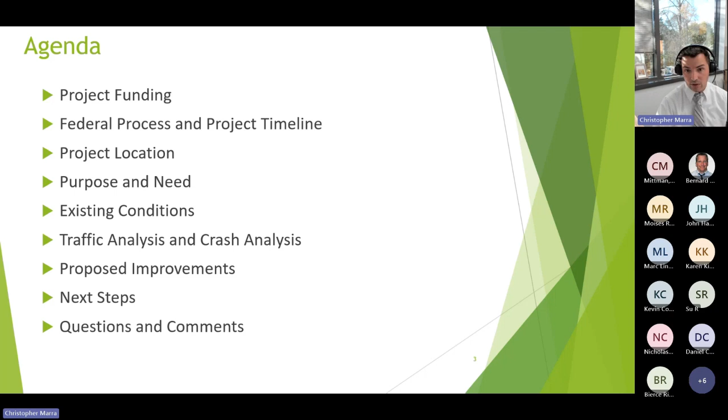Today, we'll review our efforts to date for this project, starting with a quick overview of the federal funding process and NJTPA's role. We'll then review the project location, purpose and need, existing conditions, our analysis of the traffic operations and crash history, our proposed improvements and next steps, and then we'll open it up for questions or comments.

So Christine, I didn't know if you'd like to go over these two slides. Sure. So this project, both design and construction, is being funded by the Federal Highway Administration. I'm with the North Jersey Transportation Planning Authority. We're the metropolitan planning organization that represents the 13 counties in northern New Jersey. So we provide federal funds to counties and municipalities for, in this particular case, safety improvement projects.

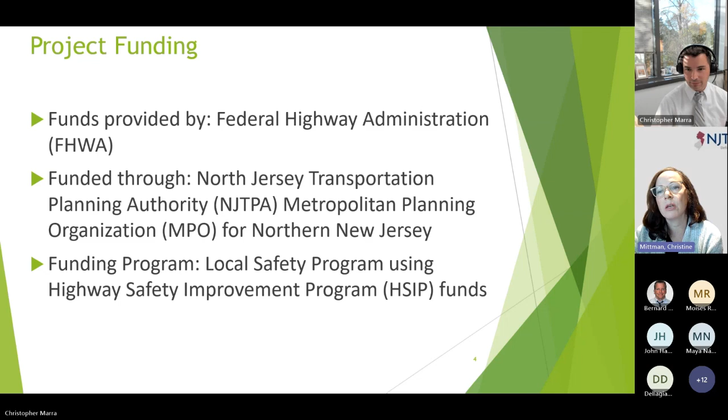So I manage the local safety program. It's a program that was created by NJTPA to fund federal dollars from the Highway Safety Improvement Program Fund. It's a special pot of money from Federal Highway that funds safety improvements at locations, corridors, or intersections which are identified as high crash based on existing crash data. So we have a solicitation that we do with our counties every other year. They submit applications, and then once our board approves them, we move them into design, and then ultimately, as we go through this federal process, they'll be authorized for construction.

So this is the federal process and the project timeline. Like I said, it was an application approved by the NJTPA board into a specific program year. We went through consultant selection to hire the design consultant. Once they were on board, we began preliminary engineering. That's the phase we're currently in. The consultant has spent quite a bit of time now working on data collection, laying out and refining the design of that intersection based on the data that they have collected.

We've met with local officials, and then we're here tonight to do a Public Information Center, and that's a required and integral part of any federally funded project, because at this point we're looking for comments and also answering questions from members of the public on what's being proposed at this intersection. Once we complete this PIC meeting, and if there's any changes made to the design, then we move on to getting an environmental document approval. It's a process that we work with New Jersey Department of Transportation on. It's part of every federal project to have an environmental document.

It's called a categorical exclusion document approval. Once we have that, then we can move into final design and right-of-way if there is any on the project, and then the project can be authorized for construction. This whole pipeline process that you see here laid out takes about 5 years from when a project first enters to the time it gets to construction.

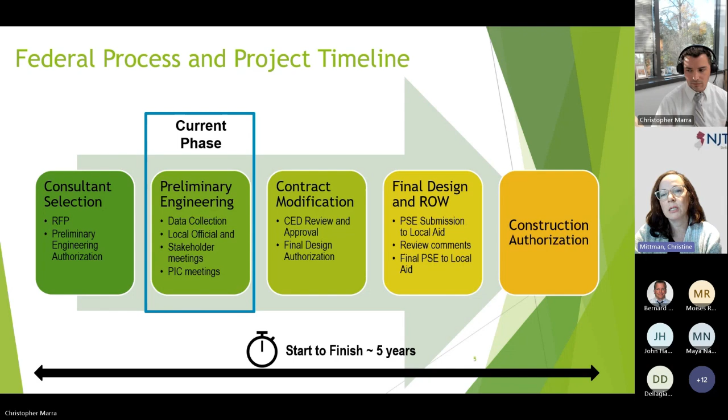So we'll go over the project location. The project area consists of the intersection of Morris Street and Ridgedale Avenue, located approximately 800 feet west of I-287 and a half mile east of the Morristown Green. The area is primarily commercial, with a BP gas station, GT Motors used car lot, and Meslers Auto Body located immediately adjacent to the intersection.

There are residential properties also close by, including the recently constructed Max on Morris apartment complex in the southeast quadrant. The project intersection serves as one of the primary gateways into Morristown, and multiple NJ Transit bus lines on both Morris Street and Ridgedale Avenue, coupled with its close proximity to the Morristown train station located just west of the project area, make it a major hub for transit users and pedestrians.

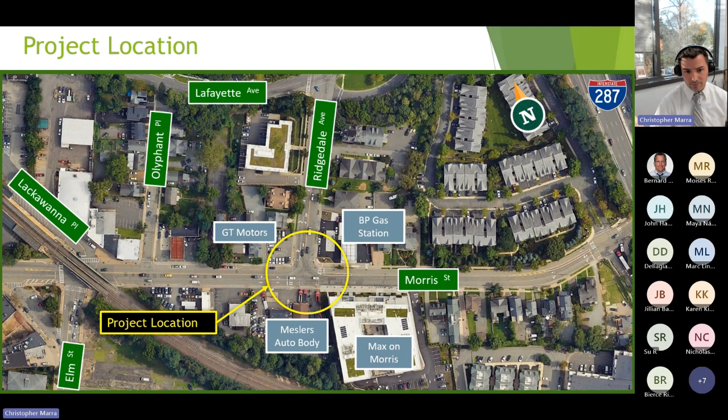The project purpose is to provide safety and operational improvements at the intersection of Morris Street and Ridgedale Avenue. The need is driven by the intersection's ranking as number 11 in Morris County for NJTPA's 2023 network screening list. There was also a road safety audit conducted in October of 2020 along County Route 510, which included this intersection and identified numerous deficiencies contributing to the high crash rate within the project limits and at this intersection.

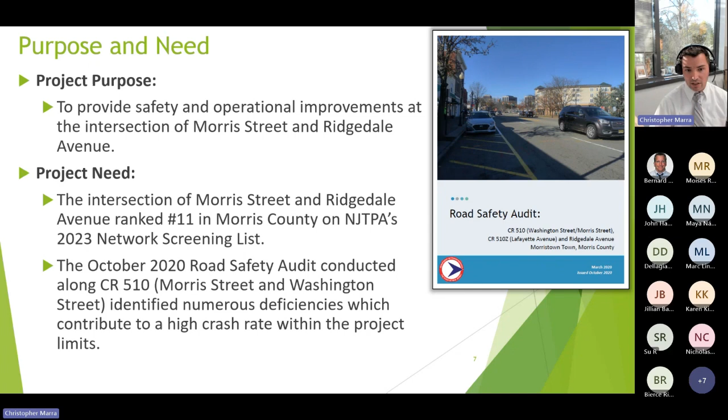Morris Street, also known as County Route 510, is an urban principal arterial consisting of 3 lanes, 2 eastbound and 1 westbound, with an ADT of 22,000 vehicles per day. Ridgedale Avenue is an urban minor arterial with 4 lanes at the intersection with Morris Street and an ADT of approximately 14,000 vehicles per day. Both roadways have posted speed limits of 25 miles per hour.

The project location suffers from a number of deficiencies which reduce accessibility and contribute to congestion and a high crash rate. The existing signal equipment does not meet current ADA and MUTCD standards, and the sidewalks and curb ramps are also non-compliant and/or in poor condition. Parked vehicles in lots adjacent to the intersection corners regularly encroach into the sidewalk area, reducing pedestrian space. The intersection corners also have insufficient radii to accommodate the turning paths of larger vehicles such as buses or trucks, and poor lane alignment along Morris Street increases the potential for sideswipe crashes.

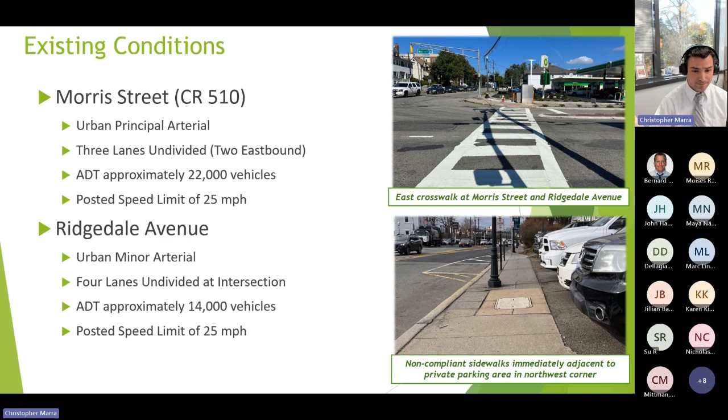In October 2022, we performed a count program to collect traffic volume data within the project limits. Turning movement counts were performed at the intersection during typical weekday AM and PM peak hours, as well as Saturday afternoon peak hours. Automatic traffic recorders, or ATRs, were installed along the main lines to collect traffic volumes for a full week along both roadways. Using the collected traffic data, we prepared a traffic model in Synchro and analyzed the existing conditions as well as the 2050 future conditions using population and employment projections from NJTPA.

Based on analysis of the available crash data and NJDOT's Safety Voyager, we identified 49 crashes occurring within the project limits for the 3-year period from January 1st, 2019 through December 31st, 2021. When compared to the statewide average, we identified overrepresentations of rear end, sideswipe, right angle, left turn, and pedestrian type crashes. We also noted overrepresentations of crashes occurring at dawn and dusk, which could be indicative of sun glare issues.

The October 2020 road safety audit identified a number of opportunities for improvements to safety and operations at the study intersection, including upgrades to curb ramps and driveway aprons. The road safety audit recommended traffic signal upgrades such as larger 12-inch LED traffic signal heads with retroreflective backplates, countdown pedestrian signal heads, audible PROWAG compliant push buttons, and also to investigate split phasing for the Morris Street eastbound and westbound approaches. Lighting, which is currently provided via decorative street lights, suffers from repeated knockdowns, which results in dark spots.

A refresh of the pavement markings and use of high visibility ladder style crosswalks, as well as signing upgrades, would benefit safety and reduce potential conflicts for vehicles. Lastly, driveway access within and adjacent to the intersection should be investigated for potential improvements.

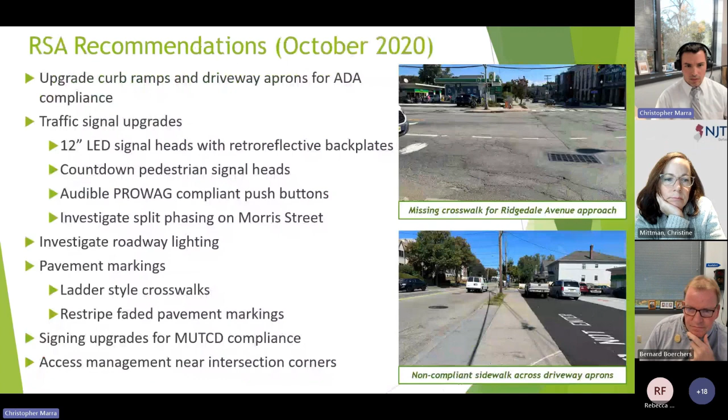So we had done the counts, which I'll go back to that slide. The counts were done in October of 2022. The actual peak hour counts that were counted, we selected a weekday. It was either a Tuesday, Wednesday, or Thursday, and then we also did a Saturday count that month. The automatic traffic recorder counts were done for the full week, so we have the full week's volumes.

I don't believe we have speed data from that. We just have traffic volumes. I could check on that and see if the speed data was also collected, but typically it's only the volumes that's collected.

Also, Chris, do you want to talk about what we do in final design? That's when you really get into the traffic signal design and the timing of each phase, and adjustments are made sometimes for the pedestrians.

For this project, at least during PE, we carefully, when we did the analysis, we took into account all the pedestrian clearances and everything. So those are brought up to the current standards. Instead of a 3.5 feet per second crossing speed, which is the standard for MUTCD, since we know this is a high pedestrian area, we looked at a 3 foot per second crossing speed to make that better for pedestrians, so there's more time to cross.

As far as pedestrian refuge islands, they're great. If some of these crossings seem long, they're good for locations where pedestrians can't make the full crossing, but our intent is to make sure that the traffic signal will provide the full time a pedestrian would need to cross. And again, with islands, it tends to be an issue because we have high bus volumes.

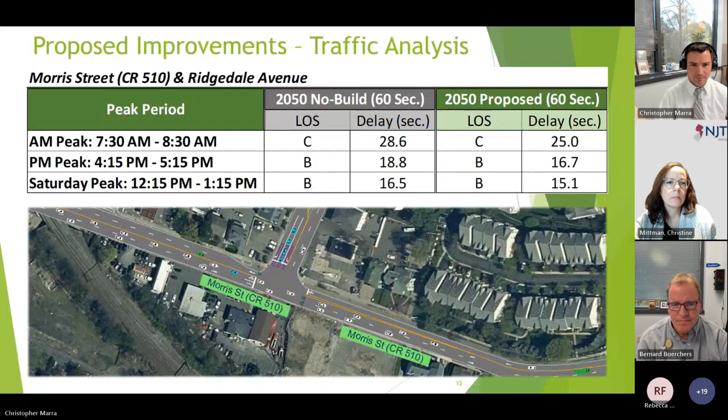You can bring them up really quick. Hang on, sorry, I gotta get Emily back in here. There we go. It's kind of difficult to see because this is a little scrunched and things got cut off. But yeah, it is a relatively small volume. I hate to say small, but—

The westbound volume coming on Morris Street: you have 86 in the AM peak, 86 vehicles making the right turn, 23 going through. PM, it looks like you have 123 making the right, and 40-something making the through.

And there are definitely alternate routes. That is—definitely, we could have conversations with Morristown. Unfortunately, we can't make that call, because the residents down Ford Street probably wouldn't want that. So that's something Morristown would have to support before we could even consider looking into that further.

I know that's how it was when I started working for the county—there was no westbound lane at that time, it was one way. I assume when that development down Ford was built, that's why it was changed. That's a good point, I remember that as well. So I think that's something, but like you said, it would have to be a conversation with Morristown. Correct.

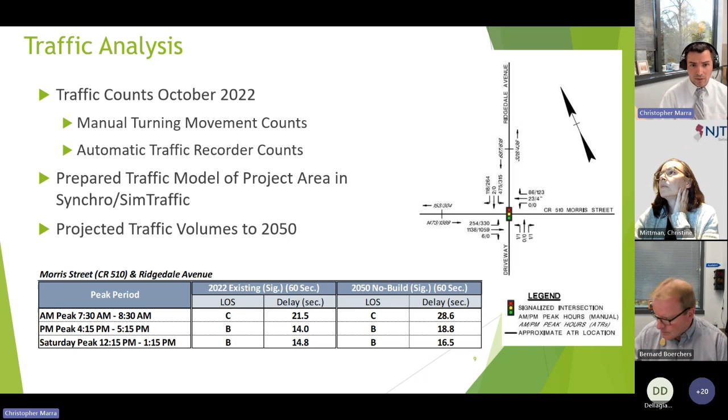A leading pedestrian interval is a non-infrastructure option that can further improve visibility and safety for pedestrians. This was successfully used at a signal in Morristown Medical Center to allow pedestrians a head start. I agree, and that's something we can maybe look at on top of the signal timing here and see what the impacts are. They typically run between 3 and 7 seconds, and that does allow pedestrians to establish themselves in the crosswalk. So that's something we can absolutely look at.

I'll go next to, I think, Nicholas, who had their hand up. I'll unmute you—if you want to unmute yourself, you can go ahead and chime in. Nicholas Calabrese, oh there he is. Got it. All right.

Thank you so much. So, yeah, I live pretty close to the intersection—I'm on 6 Ridgedale, just a little bit up Ridgedale from the project. I walk every day into town to go to work, at Headquarters Plaza, so I know a lot about the intersection. First of all, I want to say that Rebecca's claim was 100% true—that single lane really helped the traffic a lot. Everything was a lot smoother and actually flowed a lot faster too. So I can validate that claim.

Second, I notice a lot when walking on these roads that the sidewalks are very small. I'll often be walking and have to walk into the road to pass someone, because you can't really fit more than two people shoulder to shoulder, or one bigger person, without fumbling through the bushes on someone's yard or going into the road to get around them.

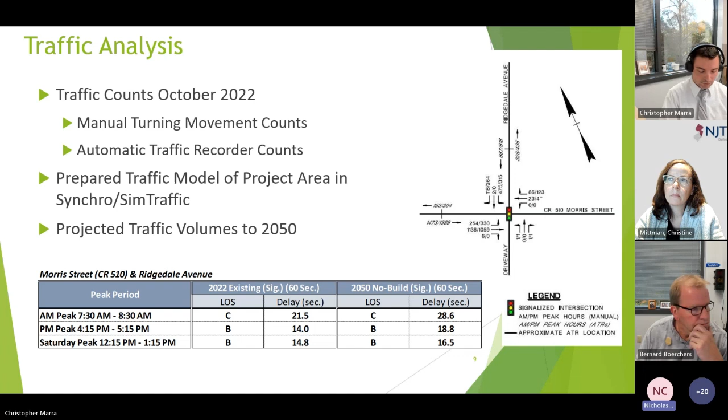As for Ridgedale Ave itself, it's not mentioned in the project area, but if you go down there are even more condos there, like two entire complexes plus the new one just built. So there's a lot of traffic that could come through this area toward the train station. I think it makes sense to make this more biker and pedestrian friendly to take cars off the road for those users who probably take the train into Manhattan, because a lot of people in this area moved here because of that train into Manhattan, to work either in the center of New York City or in Morristown proper.

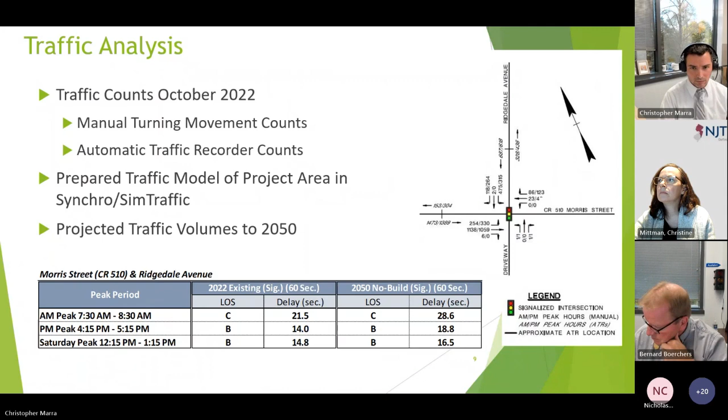Outside of that, let me see... Yeah, that's the one thing I'm concerned about: the widening of the lanes. I've done a little studying in a GIS course, and when you have wider lanes it makes people want to go faster because they feel they have more space and maneuverability. While I can see the argument that narrow lanes hurt the bus, I'm not sure where we draw the line in terms of our values for what we want in this intersection.

That's a good question, Nicholas. It is shown that a narrow lane slightly reduces speed. It's not a significant reduction, but it does have value. We really can't go below 11 feet, though, because New Jersey Transit buses' mirrors actually require that width — it's a requirement that they need the 11 feet. So that's as narrow as we're really allowed to go.

Yeah, okay, thank you so much. I agree — oh no, yeah, no problem, that's just a thing we'll have to deal with.

The other thing is, I've done a little research into induced traffic. The more traffic that can flow through will incentivize more people to drive if they can have a slightly shorter commute, which may increase the traffic volume of the area as a whole. And we're already pretty saturated, because there are two new entire office buildings just constructed, with a third one going up soon. I think if we bring more traffic into the area it will just make the clogging worse, as opposed to maybe incentivizing people to take the train, which is a pretty short walk from those office buildings.

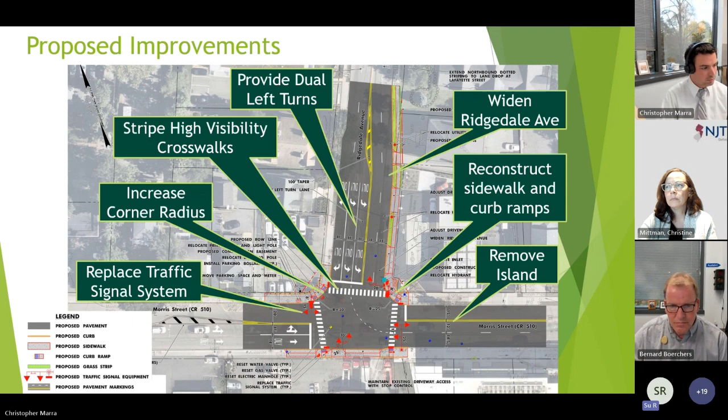I wanted to address that parents walking with strollers might not be able to cross as fast as an able-bodied person walking, so it doesn't seem like it's addressing how scary this intersection really is.

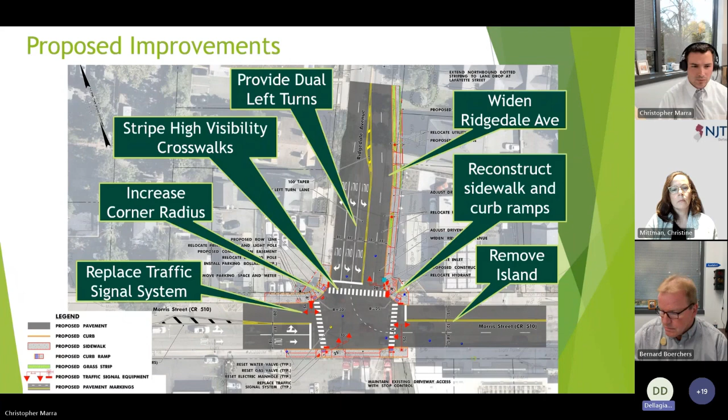Chris, do you think you could put up a blow-up of the concept with the pedestrians there? I'm hearing a lot of comments about us getting rid of or reducing sidewalk, and that's not the case. We are widening the sidewalk and making it wider for pedestrians.

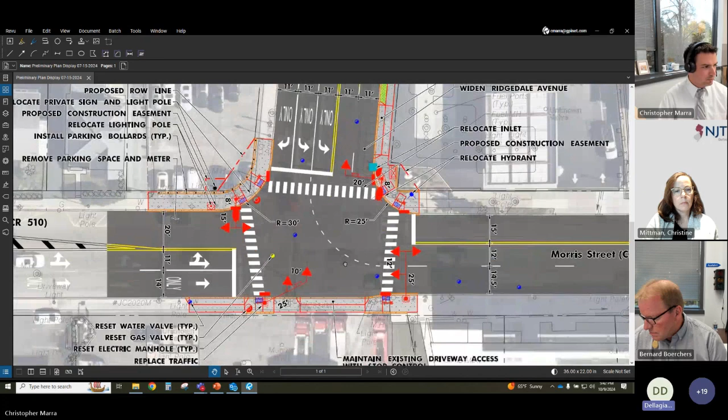Yes, we are adding the additional lane on Ridgedale, but the timing is also going to be adjusted to accommodate for that crossing. You're absolutely correct. Some of these improvements are harder to see because it's on such a small scale.

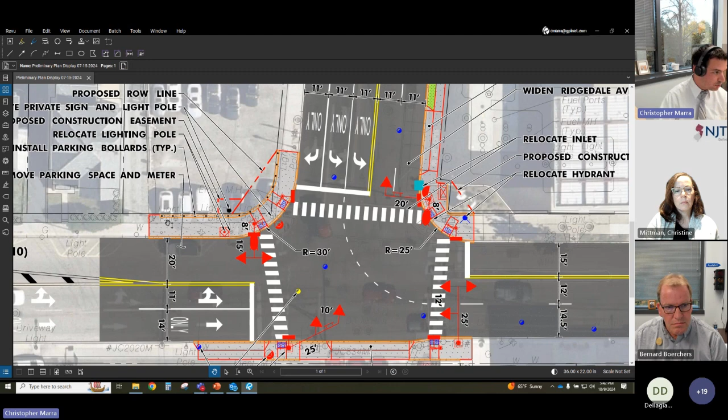With this used car lot, we found that vehicles were parking halfway into the sidewalk, which is actual sidewalk space that should be for pedestrians. So we're going to put in a curb and bollards on top so any vehicles parked in this lot can no longer encroach into pedestrian space. That'll be an improvement at this location.

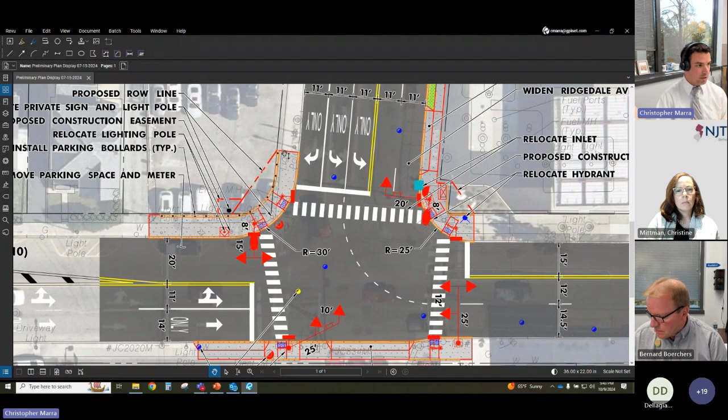We were also going to remove that light pole there because it was an obstacle for pedestrians as well. With the change to new lighting here, instead of relocating this light pole, we can basically remove it, decluttering the intersection and giving more space for pedestrians.

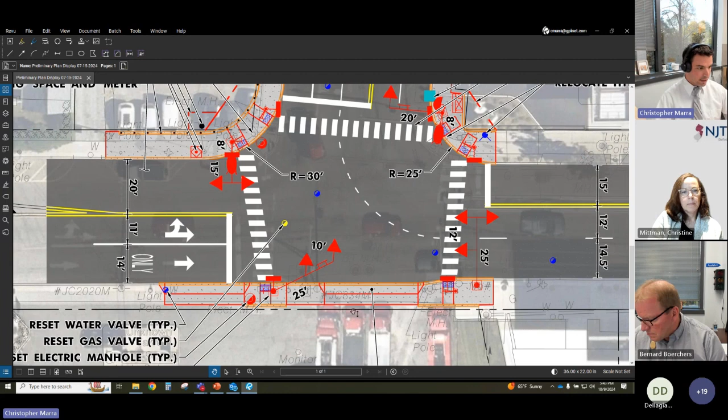On the south side, we'll reconstruct the entire sidewalk. We just have a narrow right of way here, unfortunately. With these driveways, it's not an optimal situation, but reconstructing the sidewalk with ADA compliant curb ramps and push buttons for pedestrians should be an improvement.

Along Ridgedale, where we are widening, yes we are increasing the pedestrian crossing length, but the revised timings will be a significant improvement for crossing time. You'll have sufficient time to cross. We're using a slower walking speed in our calculation to accommodate someone with a stroller, someone elderly, or a school-aged child. So these improvements will make it safer than what is currently in place.

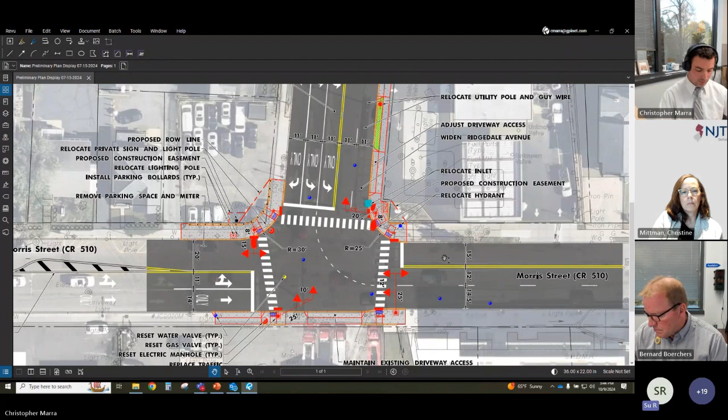I also want to ask, is this intersection, going from Ridgedale making a right turn, is it a no turn on red, or would it be considered for that kind of treatment?

Based on the signal phasing and sight distance, it wouldn't need to be a no turn on red. So we don't have any right turn restriction from Ridgedale onto Ridgedale to Morris. But for pedestrian safety, if we needed to do that, it could be done.

That's a good point, she makes an excellent point. I think the pedestrian volumes are there. You could also do like they did on McCullough and use the blank-out sign, where you get the no turn on red when somebody pushes the button, and otherwise they can turn.

They have that on 202 in McCullough. The state has the blank-out no turn on red sign, so the no turn on red would be restricted only to when there's pedestrians in the area. It's definitely something we could look at either way.

Okay, unfortunately once you put in a no turn on red, you can't remove it, so you want to make sure you're happy with it being there. We've had other intersections where towns have asked us to remove it and legally you can't. It's like removing a traffic signal, extremely difficult. Exactly, yeah, that's a great idea.

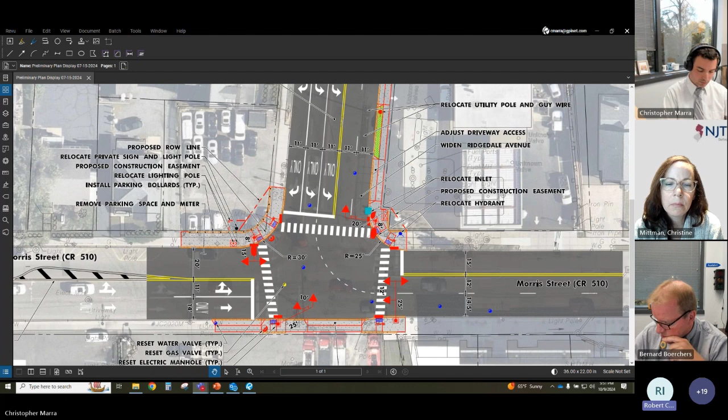My point in saying this is that, Deb, I talked with you and I talked with Jillian today. We really have to talk about, you can't wait till 2027. Somebody is going to die at this intersection before 2027. We have to sit down, and you need to have people like myself, Rebecca, and others at these meetings. You can't just be talking between yourselves without understanding what we, the people that use these streets and live with it every day, understand about how it really functions.

So a couple of points I want to make: things you mentioned about striping, signal striping, improvements to the sidewalks - let's figure out what we can phase in now. We cannot wait till 2027.

You know, what Sue was mentioning with reference to the right turn on red. Once you're in an urban area, you're no longer planning for Jefferson Township, Hanover Township, Florham Park. You are now planning for an urban center. This is a transit village, a state designated transit village. This is an urban area. Certain things that are conveniences for people driving cars are a very major inconvenience for people coming to an area they're not used to.

Thinking a right turn on red is a very liberal statement. It can't be. You have to look at this now with the eyes of somebody living, working, traveling through an urban area. This is no longer a suburban town or a semi-suburban town. This is an urban, high traffic area.

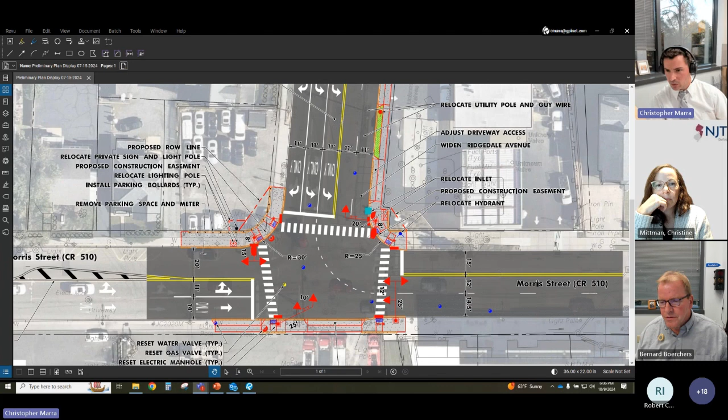He said in the westbound lane on Morris is removed. Yeah, if the westbound lane on Morris is removed, then there could be a pickup or drop off lane in front of Max on Morris to eliminate delivery drivers stopping on a no stopping street. And someone had also seconded that. Rebecca had said even the United States Post Office blocks a travel lane when making deliveries. So that's a point, that's something that could be discussed between the town and the county.

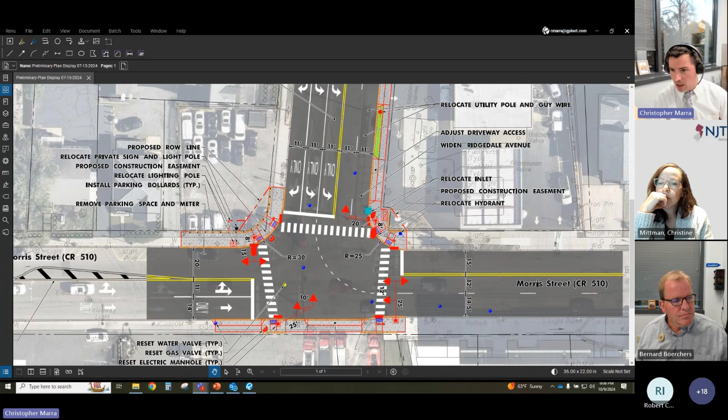Again, Matthew, potholes are an issue, as we've heard. Hey, Debbie, I got a quick question for Debbie. Before Morris Street, when it was, people on Ford Avenue, did they go down to Hill and then Elm, right?

I would have said I probably started around when that change happened. So I really don't know. I'm trying to think. I started in 2008, and I feel like when I started, it was a one-way, that section. And I'm sure Rebecca could probably tell me when that changed.

I just put it in the chat. I guess there would be a lot of opposition, depending on the people who live on Ford and Taft. So that would be something.

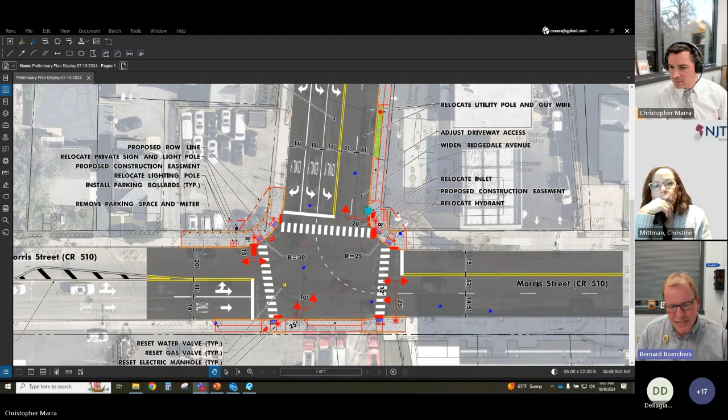I would say that I think having lived through the lane reduction on Morris, which Chris Fitz knows, took us like 7 years.

Because we've had the benefit of this pilot period, people will have found out whether it worked or not, and we won't really know unless we ask them. But it won't be the same sort of fear of change so much as asking, how did it go? While that lane was closed, what did you do? How'd you get around? Was it better or worse?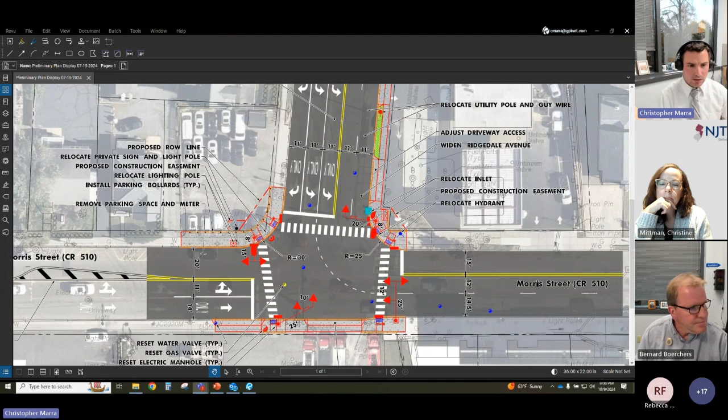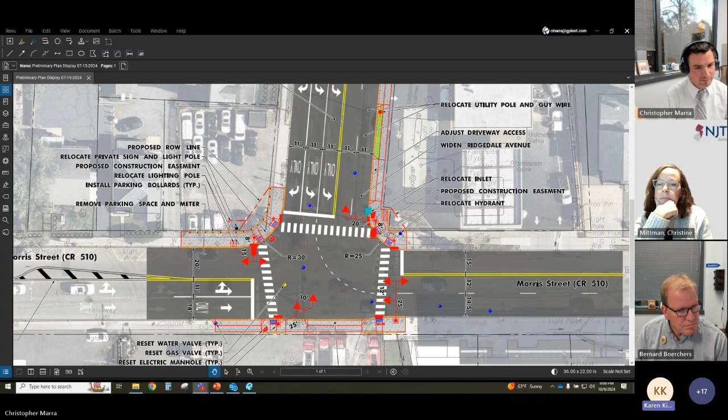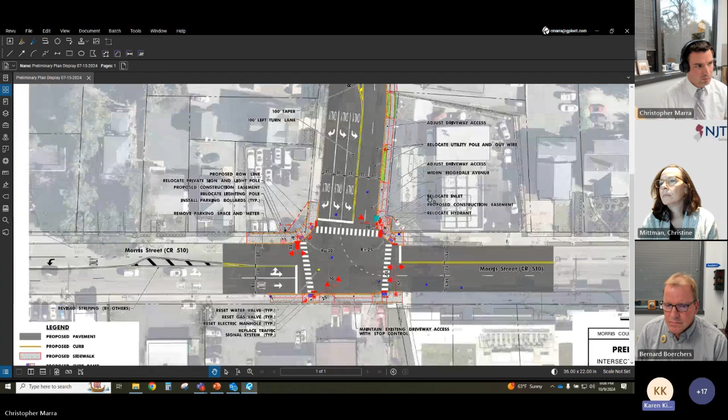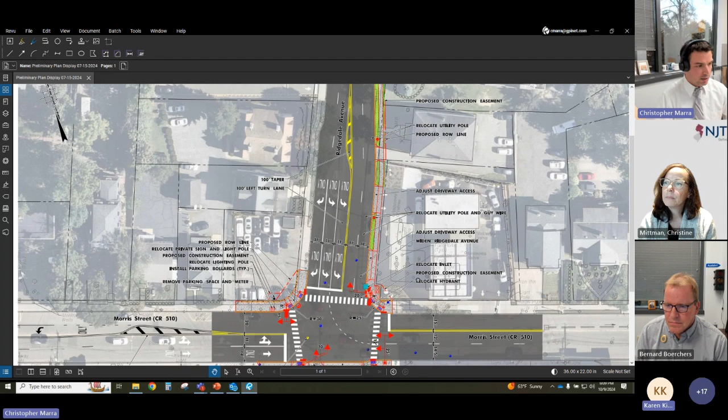Yes. I'm looking at the diagram and you want to add another lane. Are you going to have this going from Lafayette Avenue down to Ridgedale? No. Where is it going to start? It'll begin about 100, 150 feet in advance of the intersection. It's just a second left turn lane because we have a high left turning volume, to allow that through the intersection with a reasonable amount of green time.

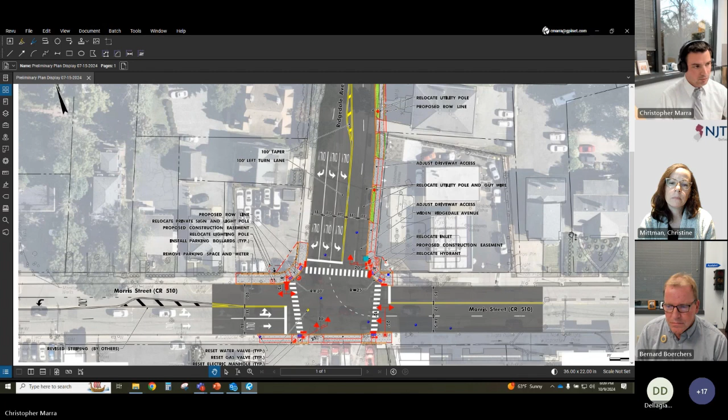You're gonna take property from the gas station to do this? Is that your idea? There's no property on the other side. The property has already been taken - the station secured that property. The gas station, you're taking it? Yeah, that's already been completed. Is that the only portion you're taking? You're not taking any others?

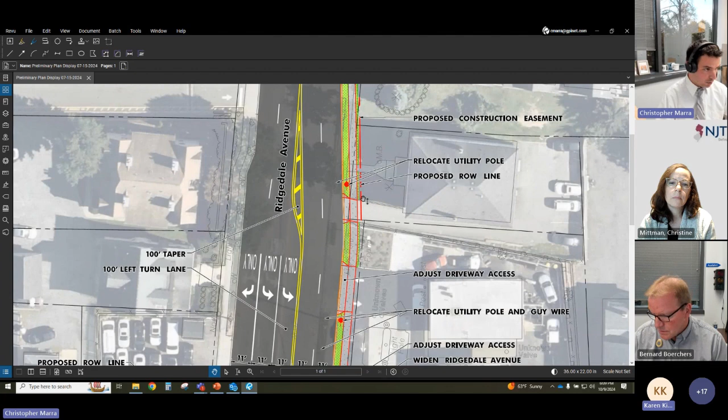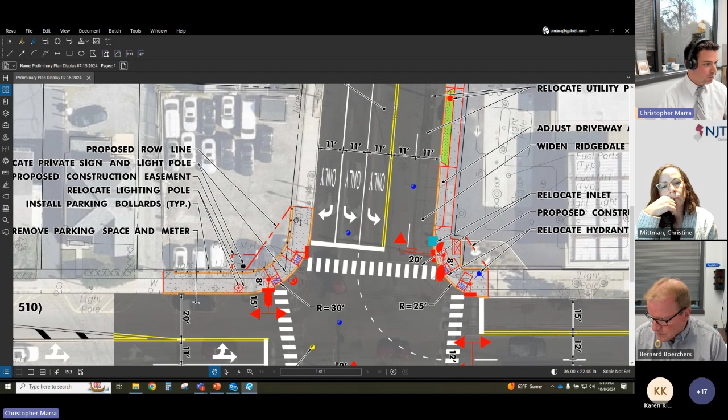No, well, based on our grading, there's a little transition back, a triangle. We do have a small section from the property immediately north of the gas station where we will be taking a very small amount of right of way just to transition and complete the sidewalk connection back to existing. And then also in the northwest corner, there is an existing light pole and sign which are within the radius of this corner, so we'll be taking a small section of right of way, and we'll need a small easement just to relocate the sign and the lighting.

Have you thought of eliminating that Morris Avenue? It was always one way, and then when they built the condos, they made it a lane down to Morris. But if you eliminate that, people can go right on 287 and at the next exit get off and even pick up 287 south.

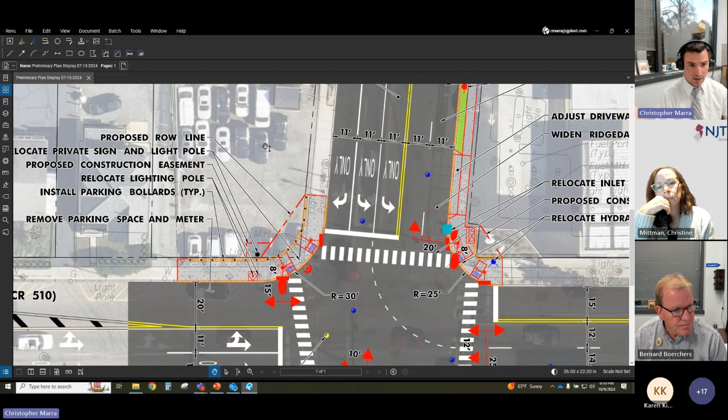Yeah, that's been a common theme of tonight's meeting. Our project is focused primarily just at this intersection, not changing any of the approach roadways. But I think that's something that the county and Morristown could discuss.

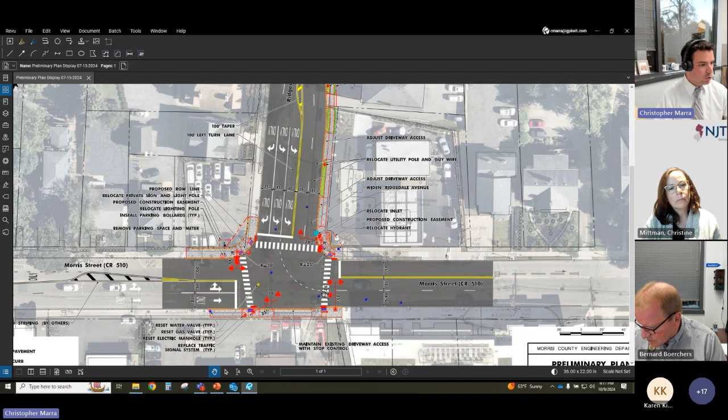Well, now you're going to have 4 lanes altogether - is that it? 3? Morris Street will be the same cross section it currently is - it'll be 1 westbound lane and 2 eastbound lanes. I'm talking now Ridgedale, how many lanes? Ridgedale north of our intersection will continue to be a 4-lane section as it is. We have a 5-lane section just at the intersection for the dual left turn lanes. So it'll be 5 lanes? Yes. Okay.

And it's going to be wide enough to get 5 lanes in there? It's tough now with the 2, 3 lanes. Yeah, that's why we'll be widening the roadway to the east into the area of the gas station parking lot to accommodate the additional lane. And all 5 lanes will be 11 feet wide, which is the minimum for NJ Transit buses. Okay, that should be it, the questions I had. Great, thank you.

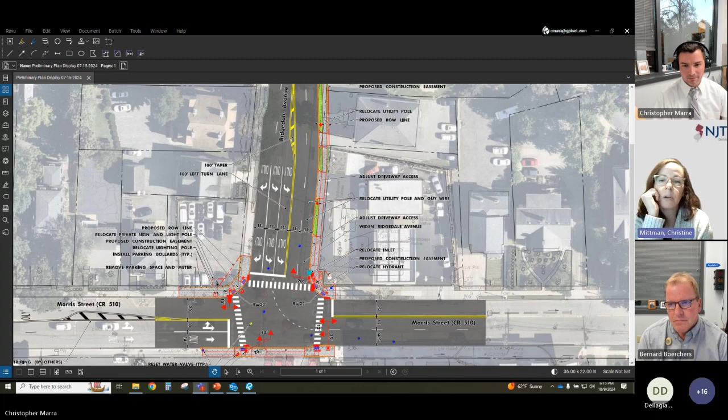Thanks, Bernie, for mentioning that. Oh, no problem. Someone's at the door.

I'll pick up with some of the comments. Matthew J. Williams stated potholes all over, no lane markings, which is a common comment we've been receiving. Nicholas stated, yes, I've had trouble crossing the street towards the gas station. I always cross from Ridgedale towards Max on Morris if I want to walk away from town.

Forum is a great idea. That was the question Christine just addressed, this legally required meeting. Again, we can come back out and do another PIC once we have some conversations with the county and municipality.

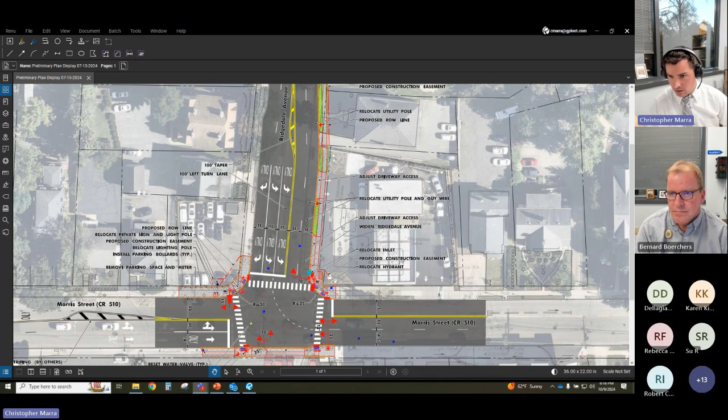Robert asked, again, can this be phased? That's something that could be discussed between the township and the county.

Is it possible, or is it impossible, to travel westbound on Morris towards Spring Street and the high school between 4:30 and 6 p.m.? Yeah, I have to take a look and see what our peak hour was. Be curious to see if it falls in that range. I want to say it was around 5:15, but we'll take a look at our peaks.

I never feel safe biking into town. Anytime I try biking, cars swerve around me. You cannot cross Morris into Lackawanna on the east side of that intersection. On the west side of the Lackawanna Morris intersection, stanchions for the train track seem to entirely prevent anyone from making a safe, ADA compliant way across the street.

Jillian chimed in about the Hawk signal at the roundabout. There's two Hawk signals there, and there's also an RRFB, a rectangular rapid flashing beacon. I'd like to go out there and see. There's two RRFBs, one on Spring and one on Morris. The Hawk is on the side street by Dunkin' Donuts, and the one in front of the train station. So every crossing has either an RRFB or a Hawk. We got it all. The roundabout that has it all.

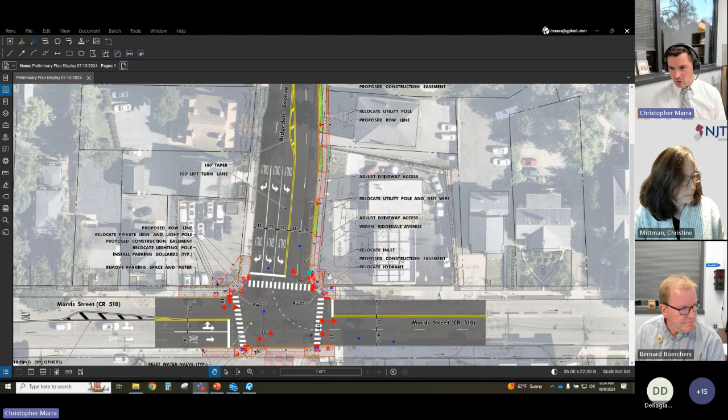Matthew stated we need a pickup and drop off lane at Max on Morris. I can certainly see that, especially for anyone ordering Grubhub or relying on delivery services these days. Drivers wait for a pedestrian to push the button and cross at Spring so they can enter and exit lot 10.

Was that Rebecca's smiley face? Yes, okay. Yes, I like that, thank you. It's true, no, I know.

Spring is a very busy street. I was surprised when the roundabout went in, but it works great. I've never been so grateful to see a pedestrian.

It's like, oh, if they push the button, I might be able to turn into the diner, or get out of this lot. Because when there were lights, there were long periods with no cars on Morris, then the signals would change and all the drivers would come rushing through.

Not everybody is running across Morris, but people are turning left in and out because it's permitted. People turn left into the new Deloitte headquarters garage, which blows my mind, and they turn left from Morris to get into lot 10. A tremendous number. There's no break in the traffic unless a pedestrian tries to cross the street and activates the beacon.

Fascinating, but you're happy with the roundabout. I have only ridden my bike as a driver... as a pedestrian, I am, because of the amenities that were added with it.

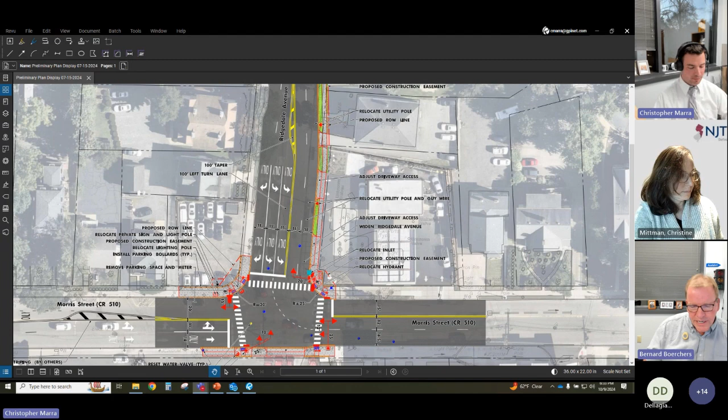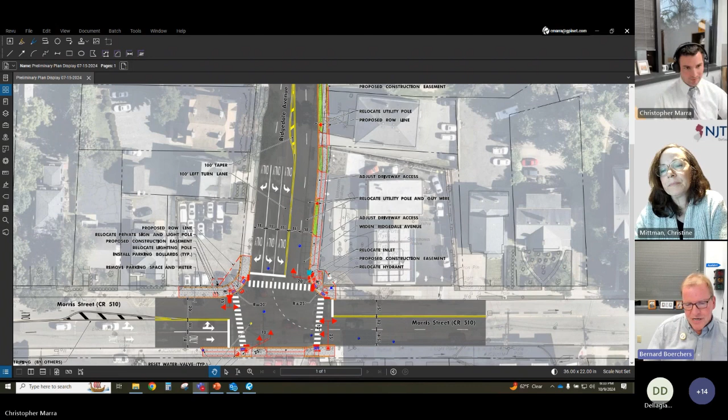It would not pass muster in England. I know, I just read that. I chuckle. I need to go to England and see theirs. I was in Ireland in the spring for a wedding, and the roundabouts function fine, but they have like a hundredth of the traffic we have here. In other countries there are so many more roundabouts, so they're used to them, second nature, whereas here there's just not as many and they're different to us. But they're gaining in popularity, and they definitely enhance safety by reducing the number of conflict points, so they're coming, there's nothing we can do to stop them. That's a proven safety countermeasure from FHWA, and we cannot fit one at Morris and Ridgedale. No, we looked at that, but it just would not work.

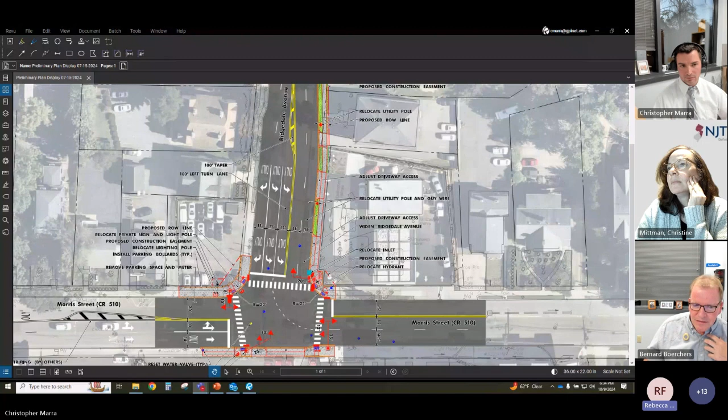Amish buggies navigate them. Oh my God, she's so right. I drive that 222 in PA, and it's an interesting road. When you drive down, it's a fairly high speed road and they have roundabouts every few miles, but people are used to them. It's way better than sitting at needless traffic lights on 22 westbound across Hunterdon County, it works a lot better. I can't believe you brought that up, I was out there recently and saw a buggy. Yeah, they seem to have worked it out, the horses understand them. We should be able to understand them too. Good reference, thanks.

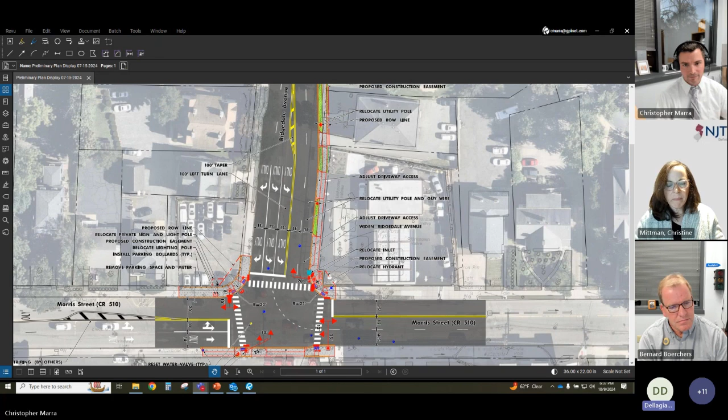But Ridgedale and Morris has always been very high on my complaint list from the residents because of the pedestrians. I've met with Morristown officials down there, and there were so many obstacles between drainage structures, utility poles, signal poles. It was such a challenge to try to upgrade that intersection, to just kind of band-aid it to make those pedestrian improvements - it was impossible. It needed so much more than just some ADA ramps.

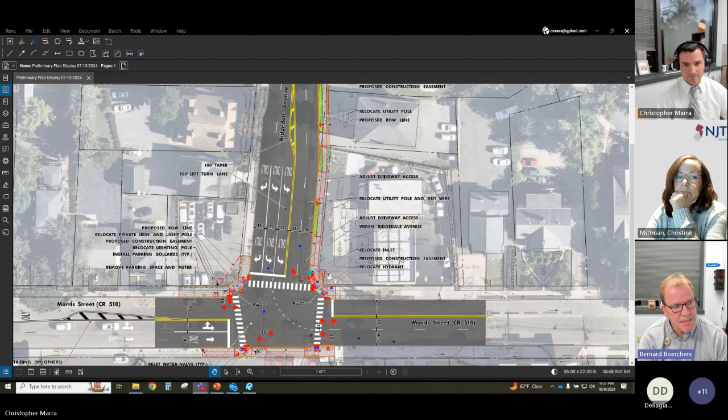And that is why it was a high priority for us to put it on for this federal grant, because it was outdated. And then when they added the gas station, that made it even more challenging of an intersection too. And then you got the tow company and the lot, and it just wasn't something that could even be done between the county and the township very easily. It would have cost a lot of money.

I lived on Ridgedale, and I used to work in Headquarters Plaza on my night job, and then I worked by the courthouse on my day job. And walking around that corner always used to frustrate me because the cars from the used car lot were always parked out on the sidewalk. I have to agree with some of the comments - you did almost have to always walk out on the road at that corner. So installing those bollards to keep those cars parked on the lot and off the sidewalk is gonna be a huge improvement for that segment.

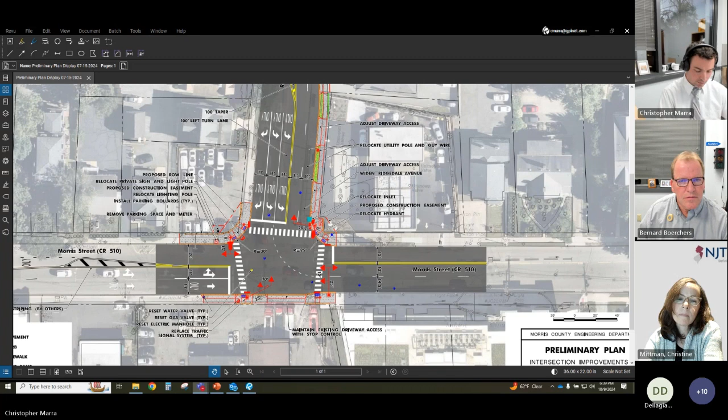I'm actually hearing here what was our level of thought when we were going for the federal grant, when we had funding through an approved project? We do have to sit and talk about this, because it's not good that we went around to find a grant when we did have an approved project with responsible parties for the traffic improvements. So we really have to take a look at this, because there is some work you're hearing on this call - there's some work that is a safety issue today.

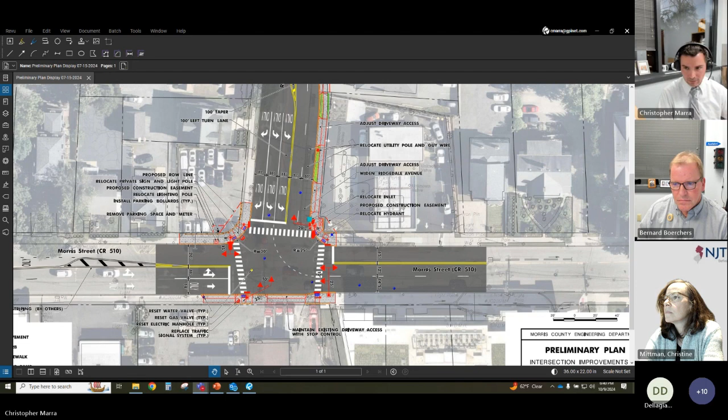I'm just going to say one more time in case I get lost, because I am on a train now. We really got to make sure that if there is other funding that has to come from the county or has to come from the town or has to come from a developer, that we talk about what we have to fund now. So in the context of your plan, am I making sense? Because everything you're hearing - I'm sorry, I can't make light of this situation - we cannot say get off this phone and say okay, we're going to go through this 5-year process. We can't do that.

Well, hopefully there's ways to - I think Debbie said - work with the town and with the existing signal, there are some improvements, increasing the pedestrian clearance time, and at least some interim improvements can be made. But what you say makes sense. So maybe one of the things you could do to help with that is give us an explanation of how some of this work could possibly be phased, and if there is work that should be done immediately, how do we pull that up and actually find alternate funding for it possibly?

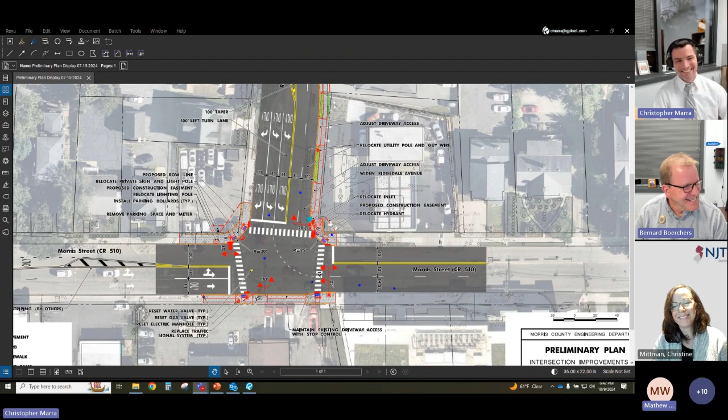I wanted to say thank you for the opportunity to speak, and I know this meeting is about this intersection. I put in comments that one thing that would work great is if that westbound lane could be closed to make space for a pickup drop off in front of Max on Morris, because it's so frustrating when you're going west on Morris and somebody suddenly stops to deliver Uber Eats or whatever. How did that development get approved without a curb they could pull into? There's no enforcement, and you've got 2 lanes of traffic.

And as Rebecca said, everybody's trying to rush to get to 287, so they're speeding through there, and then all of a sudden, pow, somebody's parking in your lane of traffic. It's maddening, and it's only a matter of time before someone gets hurt there.

The other comment is, again, I know we're only talking about this intersection at this meeting, but as Bob said, if we can take a bigger look at the picture, the traffic going through town at 5 o'clock is a nightmare. I live in Washington's Headquarters, around the corner from Rebecca and Bob. I've got 2 high school kids who constantly need to be picked up or dropped off from after school activities, and trying to get from Washington Headquarters to the high school down Morris and up Spring can take 45 minutes between 4:30 and 6 o'clock.

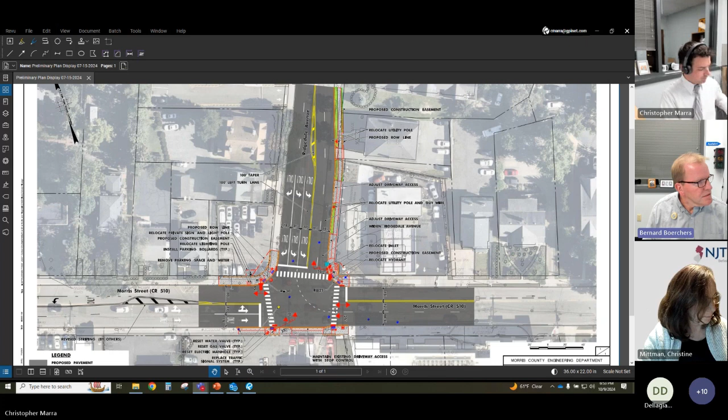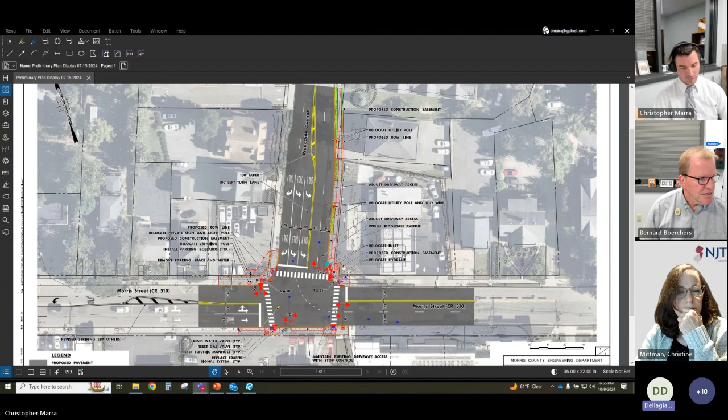So if you go out of Morristown Memorial, you go down Franklin, cross over really quick and go up Ford, and then get onto Morris. Ford is one of the few crossings until you get all the way up to Elm Street. Ford will take you right to the back of the hospital. If they didn't get across on Ford, they would either have to go all the way to Elm, or go all the way back to Madison to Normandy and then come up the back streets.

Okay, I can see that need there. Yeah, I've been to Morristown a couple times.

I was playing a softball game. Somebody hit a hard drive down the third base line, broke my glove, knocked a couple teeth out, broke the jaw. So I still made my meeting the next morning. Why am I not surprised?

Hi, this is Bob. Can you hear me? Yes, we can hear you.

That's not true. Talking with people that actually are there at the hospital, there is a right-hand turn which is used quite often coming out of Morristown. I've never seen it. I'm back and forth from Town Hall, I walk that intersection at least twice a day. The fact is you will never see an ambulance coming out of Morristown that way because of the way the traffic flows. There is other ways to get through, but very rarely do you see an ambulance on that westbound lane. I have never in my memory, and I'm there all the time, in that ward. You're wrong.

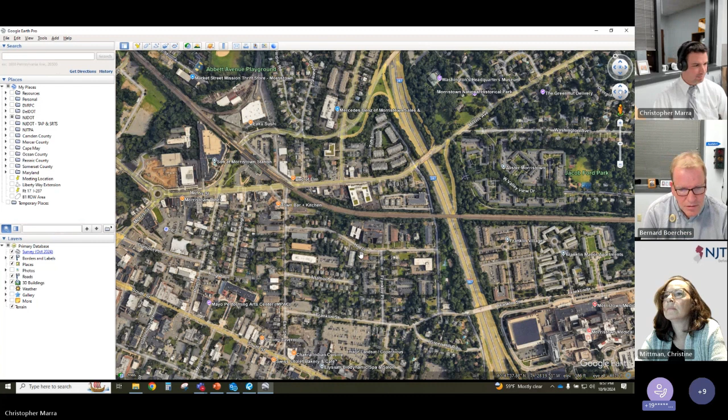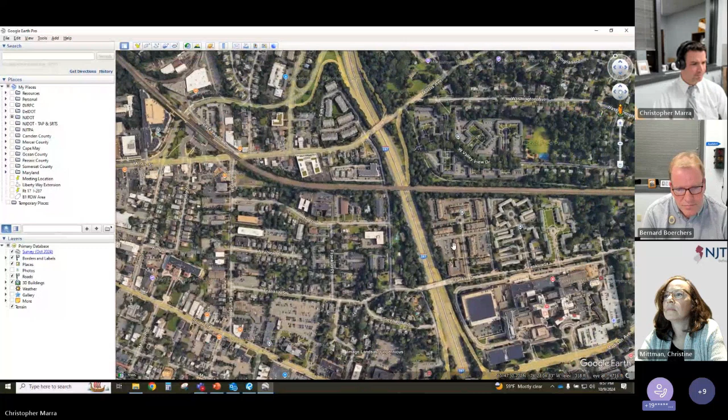I think if you're going to use facts like that, we got to not just ask the hospital, we actually have to look and see how those ambulances actually run and make that part of the traffic study. Yeah, that's something that could be revisited.

I'm sure Chris would know. I wasn't part of that conversation that was done. No, I wasn't either. He was, I was not. When you look at it from the aerial mapping, there's only, with the rail line and then 287, only so many crossings.

So if they don't use it, then it's up to bring up for a conversation. Because if they're going to go back on 287 from Morristown, you actually go out the front of the hospital, which you do have access to, and you hop on. It's an easy right, and an easy right back on 287. That's really the way most of the ambulances are going. I also know because I used to run the ambulance service. So, no, I see what you're saying. You just make the right from Morristown, on the ramp, boom, boom, and that's how they all go to avoid going through town.

Well, once again, that's a good conversation to have. And like Christine said, we can put a pause on the CED while that's investigated.

It would be good if you're discussing, especially the westbound direction, to get any representatives from EMS, fire, police to discuss that, I think that's important. And Chris probably knows a lot of the history too, but unfortunately he had a county commissioners meeting and he couldn't be here.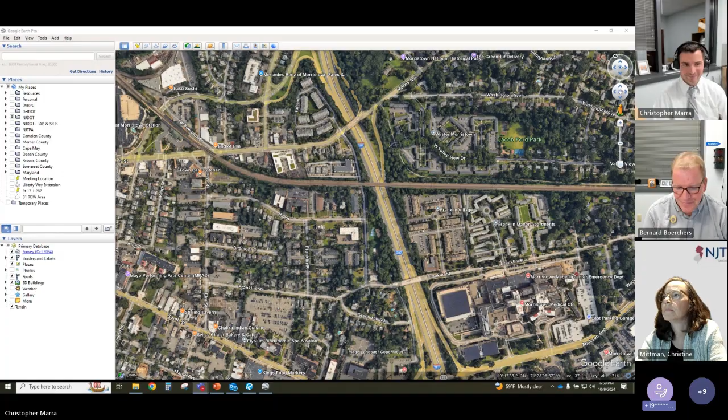Discharge, what does that say? A discharge on the east side of the hospital. Yeah, okay.

Yeah, I know that very well. All my 3 boys were born there, so. Two at the same time.

Bernie, we learned so much about you tonight, things we didn't know. We have more than we ever wanted to, and more than everyone. Thank you, Christine. I'm going to take that in a nice way. I meant it in a nice way.